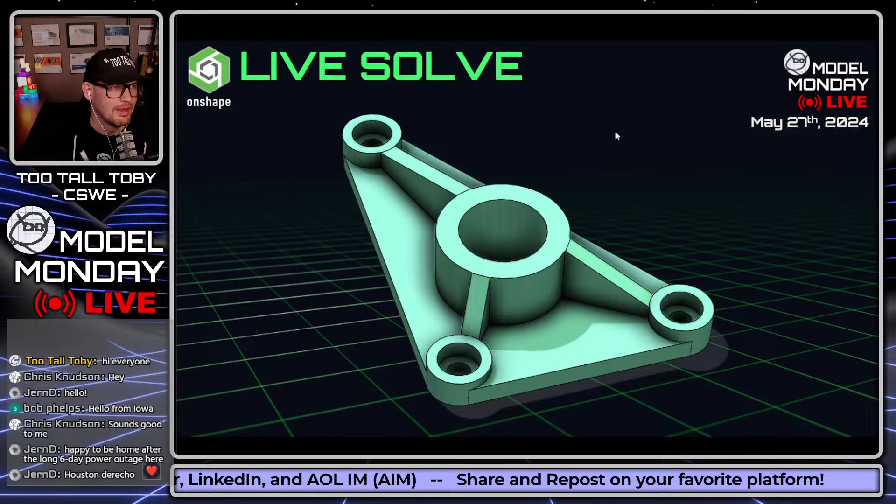All right, let's do it here. We're going to do a live solve using SolidWorks. Whoops, that's a lie, there should be a live solve using Onshape. We're going to solve that model, and of course, we're going to do our live challenges.

If you're here for the first time, let us know in the chat, and there are lots of chat pros who will help you out and answer any questions that you have. But what we're going to do tonight is I'm going to show you a 2D print and challenge you to turn that into a 3D model to calculate the mass and to enter that mass directly into the YouTube chat. And the fastest person to do this will be declared the winner of the point.

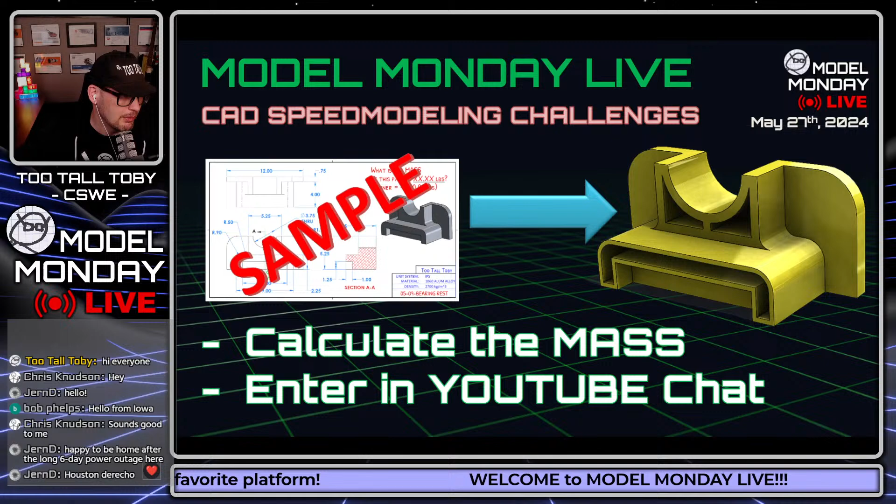Final points are up for grabs right now for the month of May. And then we will move into June, and we'll talk all about what's happening in June here in just a moment. But the basic rules are that you can use any 3D CAD package.

As long as you can input the density and output the mass, you can use any 3D CAD package.

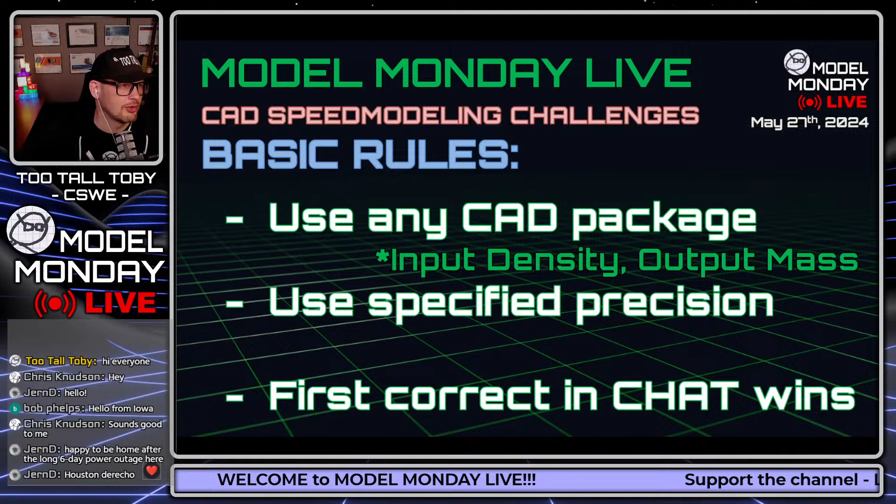Make sure you use the specified precision on these answers, and the first correct answer in the chat will be declared the winner. The unit systems we use here are IPS and MMGS, inch pound second and mmgs.

The materials we use are listed down below. If you're here for the first time, make sure you capture those materials in your materials library so we're all working from the same materials, so you don't get caught off guard. We want everybody to have the correct material density in their library, otherwise you're not going to calculate the mass correctly.

This is meant to be fun and good-spirited. Occasionally I will make a mistake. I'm going to be honest with you guys, I didn't really properly quality check the second challenge tonight, so it's possible the second challenge is going to put you on a wild goose chase. But we'll see what happens, maybe I'll click along and see if we can't figure it out together.

And the Ivan exploit is permitted in these challenges. So the Ivan exploit is permitted, be on the lookout for any opportunity to use the Ivan exploit.

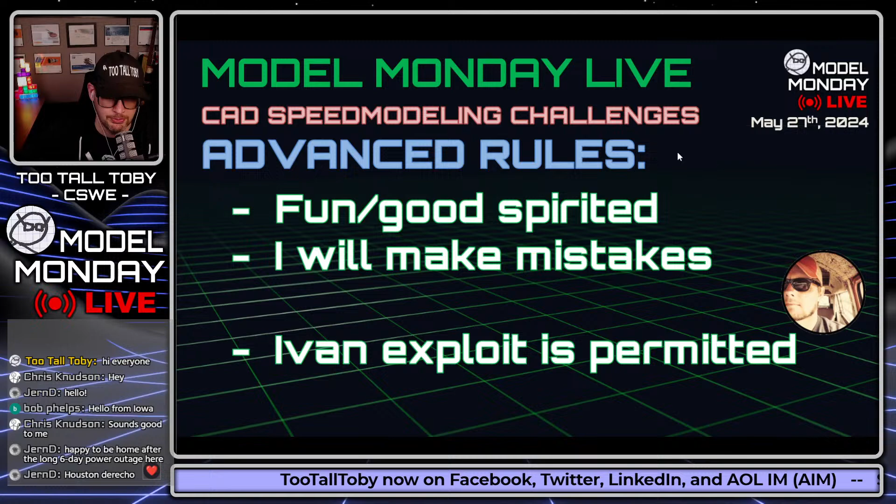All right, with that, let's get into this first challenge. This first challenge for all of you will begin in 3, 2, 1, go.

What is the mass of this part in XXX grams?

Kind of a cool part, it's called latch lock. This part is using 1060 aluminum alloy as the material, with 2,700 kilograms per cubic meter as the density. This part is a tier 4 part. Tier 4 indicates the complexity of the part, meaning the number of features required to make it reasonably. This probably is in between a tier 3 and a tier 4, right on that cusp, right on that magic cusp between tier 3 and tier 4.

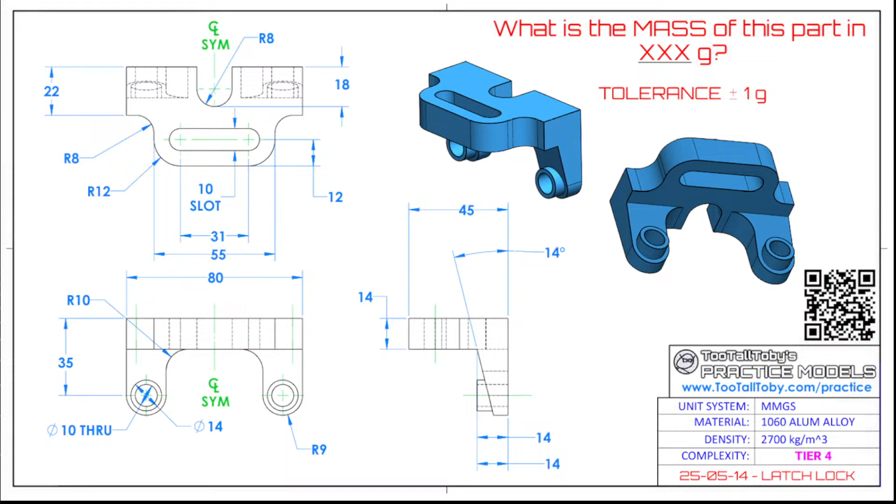Let me know, guys, if the music is too loud. I'm digging these tunes, so I'm going to leave them up a little bit. All right, let's get into it here.

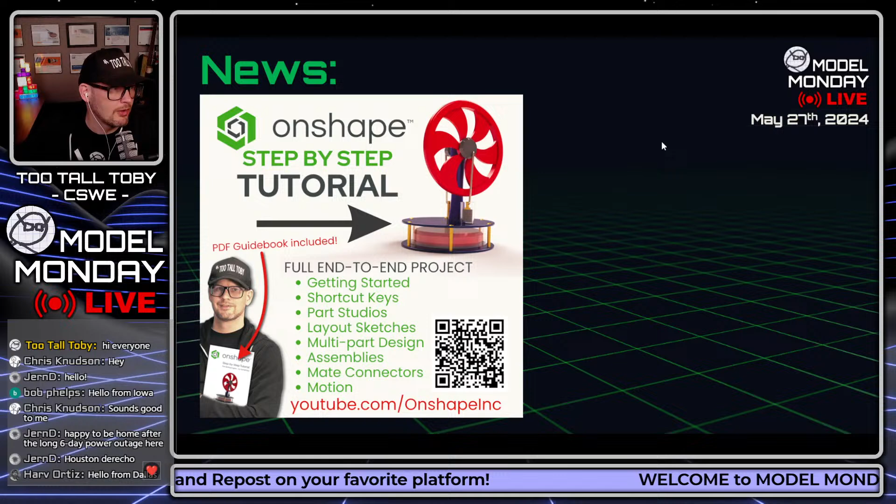We did post a nice Onshape tutorial a couple of weeks ago, so if you're an Onshape user and haven't had a chance to check that out, do so—it'll give you everything you need to know about Onshape, a start to finish, end-to-end tutorial. We also posted another video here on the TooTallToby channel this week for Onshape. If you go to youtube.com/TooTallToby, which is really where you are right now, you'll see that video posted this week on branch and merge.

This is huge. I can't understate how valuable this idea of branch and merge is, especially the merge part of it. The fact that Onshape can merge geometry together is huge—you're going to hear me talking a lot about that over the next few weeks. Definitely check out that video if you haven't had a chance. I know those videos are a little bit long, so if you're really trying to strap in and learn Onshape, they're going to be good for you.

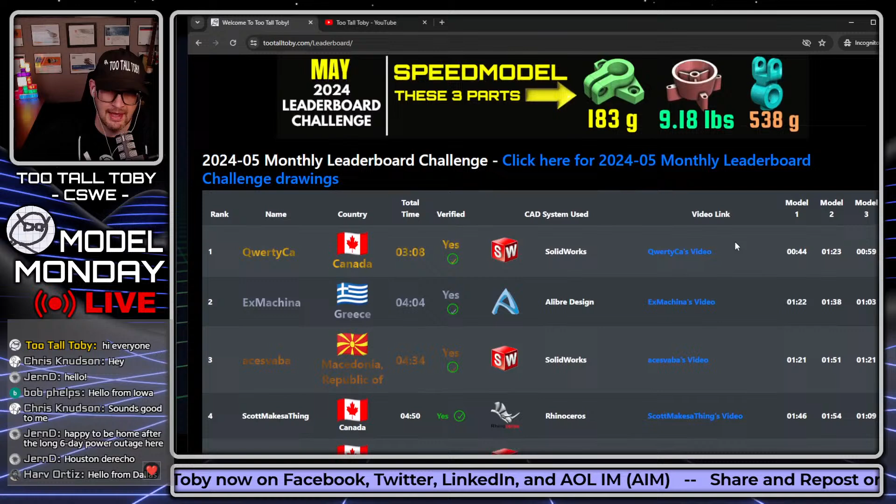QWERTY CA, who came in first place last month using SolidWorks, is once again just dominating and showing some clever workflows. I encourage everybody to take a look at this video. What you're going to see almost looks like it's sped up, but it's definitely not. This is actually how fast QWERTYCA is with his commands, and a very clever workflow, particularly the use of the shell command after he gets this fillet in place. He's going to do a shell here and a multi-thickness shell to create that geometry. I mean, that happened really fast. This is almost something we could slow down rather than speed up.

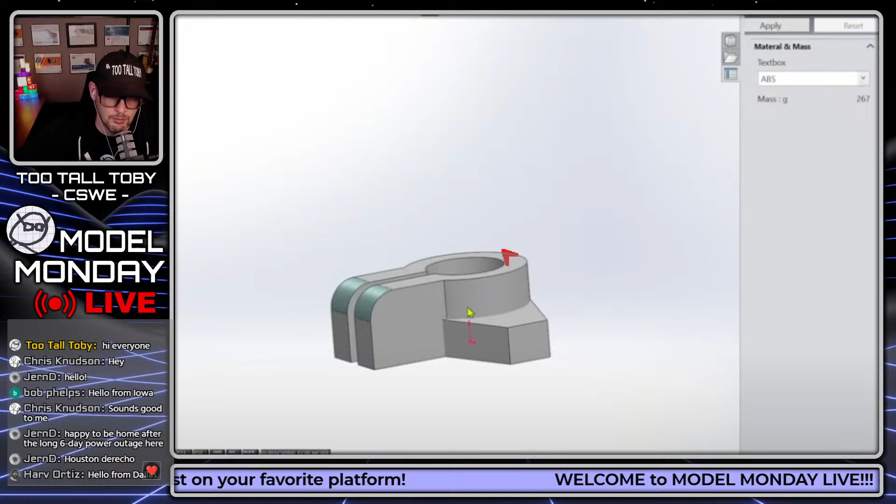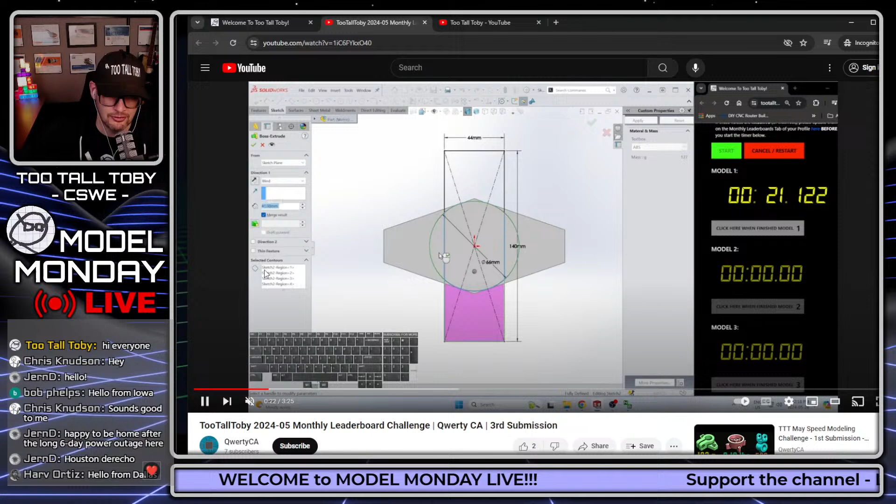Let me pause it here. If you look at this shape, we've got a wall thickness here and a wall thickness here. Most of the time what people would do to accomplish this is sketch a circle and a rectangle and then cut extrude down through the model. But instead, what QWERTYCA did was a multi-thickness shell for that feature, which completely blew my mind. He did that as a shell to hollow that out. It happens really fast - here's the extrusion, now he fillets, face fillet, now he jumps into a shell, switches to multi-thickness, picks these two faces, and then you end up with this geometry.

So I'm excited to do kind of a reacts video to this run. This is a really impressive run. I definitely encourage anybody considering doing the leaderboard challenge to take a look. But even if you're not going to do the leaderboard challenge, just take a look at TooTallToby.com/leaderboard and watch some of these runs. It's incredible, not only the speed, but also how clever some of these features are that he's using.

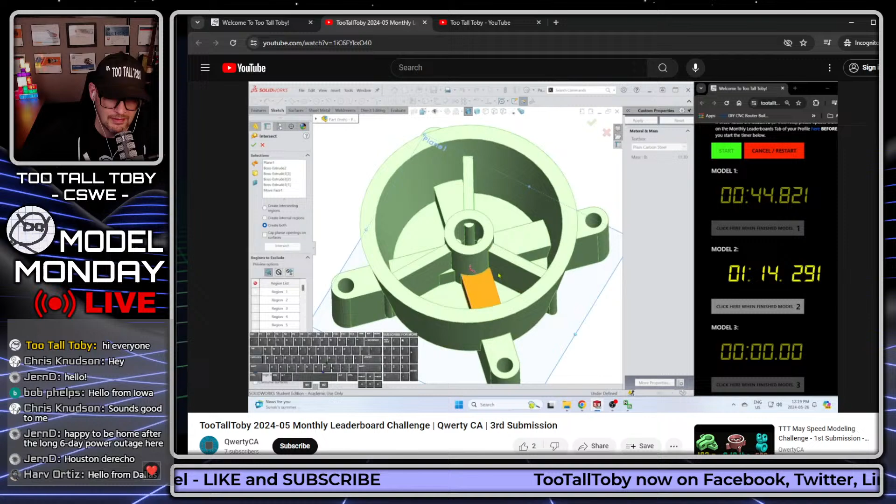Like in the case of this model, when he gets to this internal geometry, the use of the intersect command to clear this out - I would have never thought to do it that way. He's going to go through and use intersect to remove certain bodies and remove all the excess geometry from that part, and then end up with the correct mass. Really, really clever use of intersect.

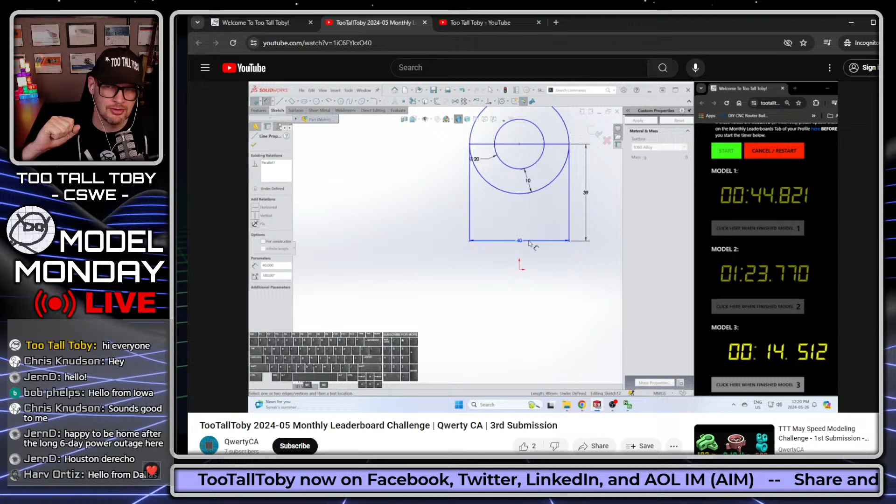The cool thing about watching these runs is that you get the chance to see an out-of-the-box way of thinking about using certain features, and you may end up finding a good spot to use those same features in your own career. Even if it's shown as a SolidWorks feature, you might find a way to use that in Onshape. There's been plenty of times where I've seen people run stuff in Onshape and then used it in SolidWorks, or seen it in SolidWorks and run it in Onshape, or seen it in Alibre.

Ex Machina is in second place here with a time of 4:04 for creating all three of these models. Super impressive, and some really clever stuff he's doing with Alibre. I dabble in Alibre as well, and he's doing some clever stuff constructing these models. So again, even if it's not your CAD system primarily, just watching other people run through these models and thinking to yourself, wow, that's a clever way of getting that geometry or feature - I wonder if I can do that in my CAD system. And you try it, and then you're like, oh, that works great.

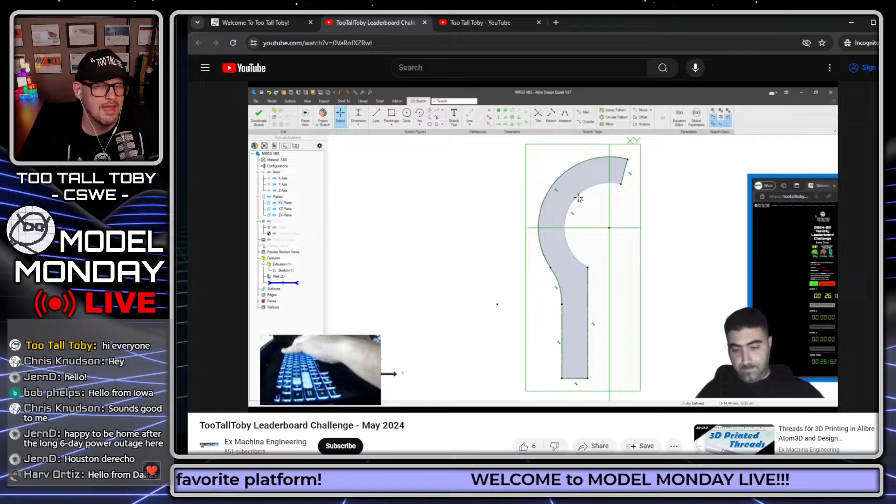Like Ex Machina, the way he did it, instead of doing the shell with multi-thickness, he extruded that first extrusion as a thin feature extrusion. And then later in the model, he does a move face to clean up that extra geometry. Just kind of thinking outside the box a little bit, and I think very clever solutions to some of these challenges. Later on in the model, he's going to use move face to move this over a little bit. I think that's a really clever way of going about that.

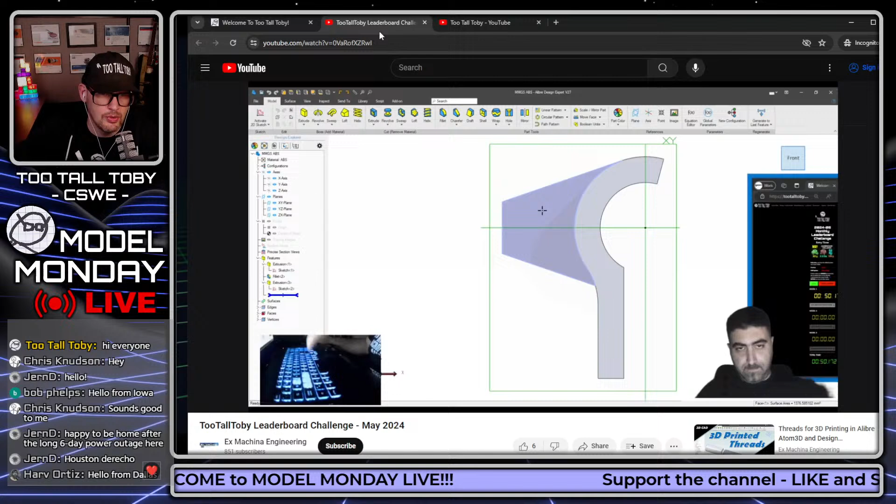Right here, we're going to see this move face. He's going to shift these faces in. There it is, move those in. So cool, I just want to see that again. Anytime somebody uses move face, I think they get bonus points. Here you see he's doing, it's called offset face in Alibre, but basically a move face offset there. Look at that, that's so cool. And then just filleting those edges from the top down. Very, very clever, very good workflow, and definitely some stuff to learn there, even if Alibre is not your CAD package of choice.

So you can see here what this leaderboard looks like currently. There's basically 9 people on it, my run is down here as well, but there's basically 9 people on this leaderboard if you ignore my run. And they are all very, very impressive. There's a Rhino user on here, there's an Onshape user, there's no Fusion 360, no Inventor so far. So I'm going to try and hit up those message boards tomorrow and see if I can get some of those runners in there.

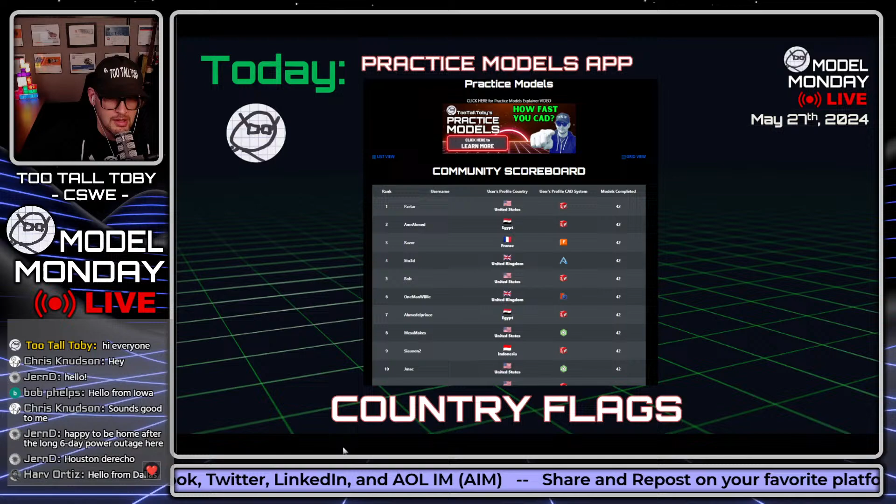And of course, the Practice Models app, I mentioned it earlier in the live stream. We've done some updates to the Practice Models app. We've added the country flags of the people who are completing the models, and we've added the completion ratio. So now when you are in the Practice Models app, which means you go to TooTallToby.com/practice, that's where you'll find it.

Once you go to TooTallToby.com/practice, every time you finish one of these challenges, it'll say completed, and you'll get a little color thumbnail of the challenge that you completed. But for the ones you haven't done yet, when you click into them, you can see how many people have successfully completed this challenge. Now, that may be because 173 haven't tried, or it may be because some of them were getting stumped on this challenge. Some of these challenges are harder than others, so it could be that people are getting stumped on the challenge.

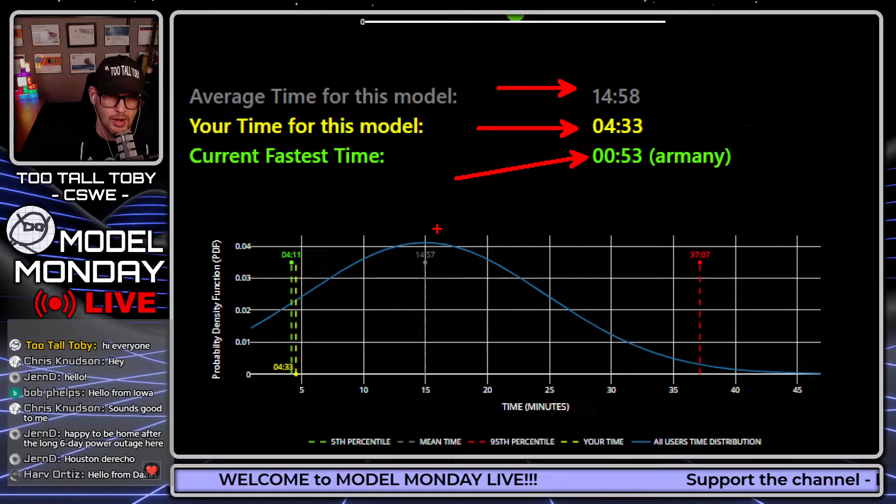When you do complete the challenge, what you'll see is some additional analytics here. You'll see who finished this challenge the fastest, you'll see what your time was. So your time, 4:33, average time almost 15 minutes, fastest time 1 minute - wow, that's pretty fast. We do purge the times that are at the very bottom of the curve if it seems like they're unrealistic, but.

Another great app for you to try out. You go over here to TooTallToby.com/practice, you can get in here and you can see all of these different practice models. And if you go to the tab that says Community Scoreboard, then you can see the top of the scoreboard here.

One Man Willie from the United Kingdom has 42 models completed, a FreeCAD user. So 42 models - there are 42 models total currently. You can see here there are 12 people who have done all 42 of the available models. We just released the newest one, I think, yesterday. So that's pretty impressive considering it's a holiday weekend.

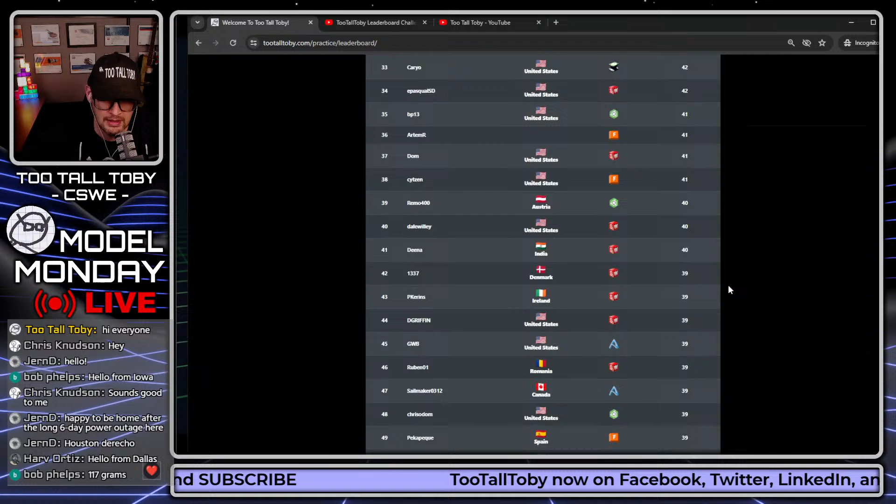People are on it. Lots of people on this completionist board, and lots more good stuff coming in the future with the analytics, but kind of some cool stuff. You can see how you're doing against the rest of the field, and enjoy those practice models - get them, like I said, get them while they're hot.

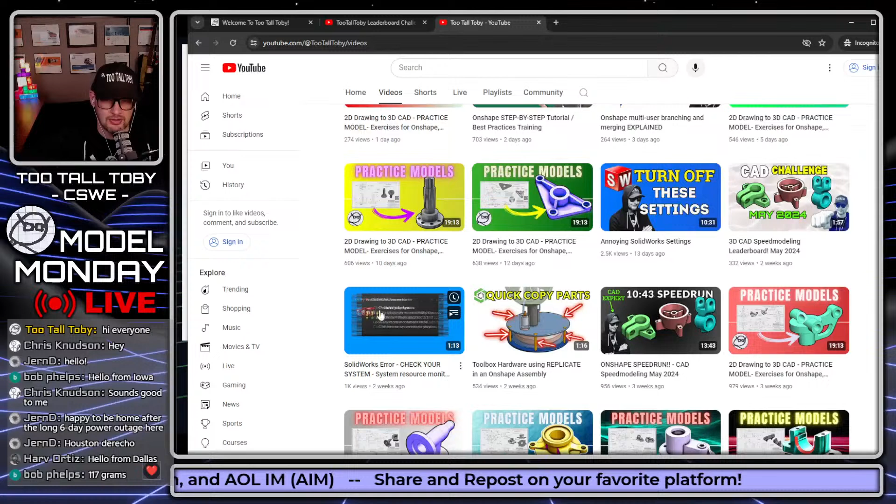The YouTube channel has mainly been practice models. I haven't had much time to post additional tips and tricks, but there is more content coming, so be on the lookout. We did post a video recently reminding people what the check your system function does. Check your system is actually a song, so if you haven't heard it before, check it out. It's a great song, and it reminds you what the SolidWorks tool does.

We also have some more practice models posted. I made a video called Turn Off These Settings, three settings that I always tell my students to turn off and look out for in SolidWorks. We've got a video on branch and merge that I talked about earlier, and then the rest are just practice models and my May leaderboard.

So haven't had too many new power moves type videos going up. Of course, we have the shorts that go up every single day, and those are like power moves, but most of the stuff has been practice models. I have been filming, I've been in the studio, so you'll see more power moves and tips and tricks videos coming out this week and next week. But of course, the shorts come out every day.

We've been doing a new short every single day since January 17th, except for one single day that I missed, and I made up for it early the following morning. So just about every single day since January 17th.

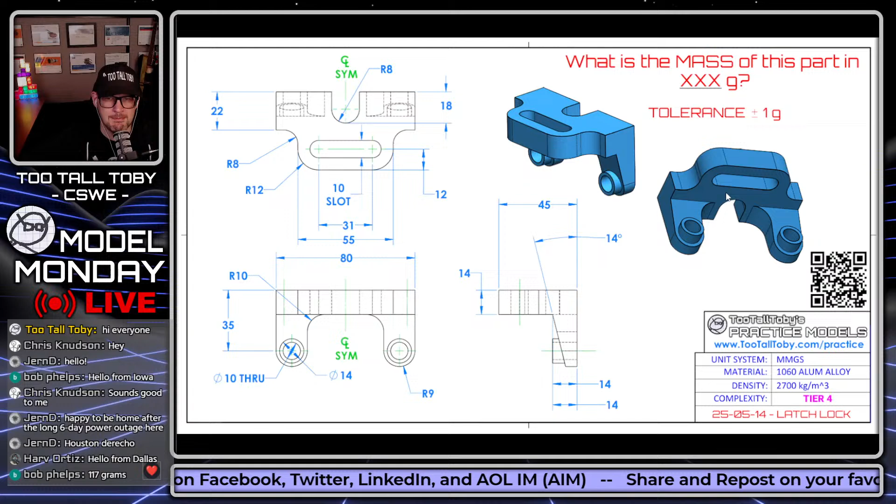Whenever you're trying to create a 3D CAD model, you always want to start out by coming up with a game plan. If I was looking at this model here, I think my game plan would be to start by looking down on the top, kind of creating this sketch as a footprint. And then I would address these little legs that are sticking out here. The leg sticks out with some draft, but it also has a fillet on top.

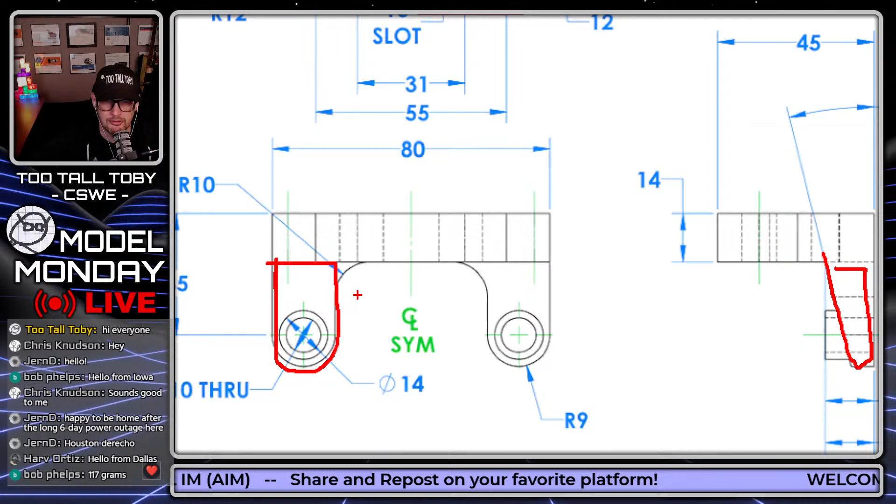I'm pretty comfortable using the draft feature in SolidWorks, so I would probably opt to create that as like a half tombstone shape, and then draft it afterwards. Then I would go in and create maybe this circular extrusion sticking out. I would just model half of the model, not the whole thing, and when I'm done modeling half, I would just mirror the whole thing. So that's kind of the game plan.

Like I said, we do have an extra couple of minutes tonight here. We're running a little ahead of schedule, so maybe I'll just blast through this one, and you guys can tell me what you think about this when we're done.

So I'll start out by grabbing a screenshot. Let's get into SolidWorks here. New - this is going to be a part using, what is this thing in, 1060 aluminum. Now let's stick to the game plan here. Always good to come up with a game plan.

Try to stick to that game plan, but if you want to deviate, that's totally cool. On the top plane, begin a sketch, orient the view, and I'm going to start out here.

Coming over with a line at 40 millimeters, come down in this direction with a line at 22 millimeters, come over this way a smidge, come back, touch that endpoint, come off of that endpoint with a tangent arc. We'll come out this way, come back, touch the endpoint, come out this way.

This one's going to have an arc of radius 12. I meant to put that radius in on the other one too, that was just kind of a misclick. And then we'll end up vertical to the origin.

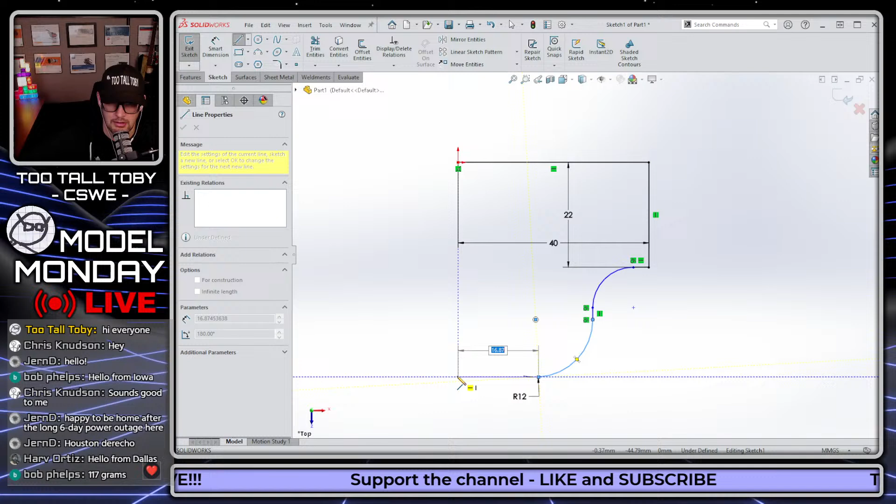Let's make sure that these guys are tangent by clicking the endpoint in between them. Make sure that's vertical, horizontal.

Let's add a dimension here, that's my radius of 8. And then we'll add a dimension from here across to the center, and that's going to be my 55/2. Final dimension here is going to be from the very back of the part to the very front of the part, and that is going to be a dimension of 45.

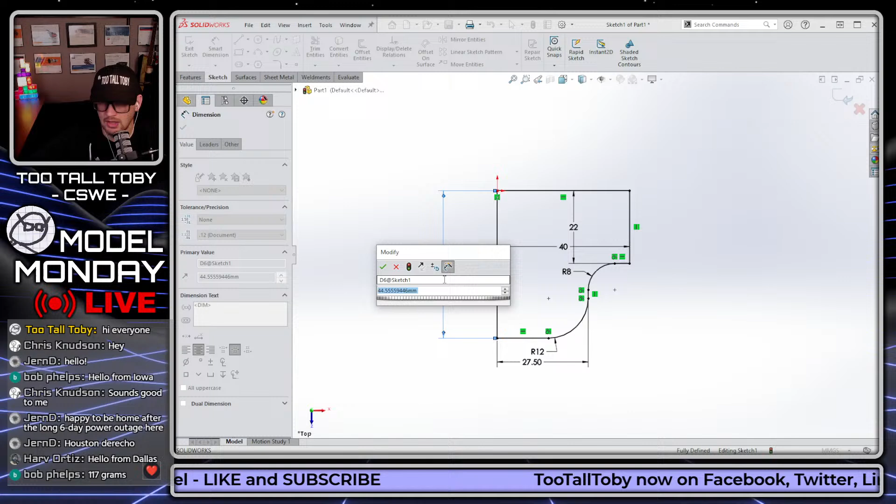And then maybe I'll add in that slot just in this sketch. I'm only going to be creating half of the model, but let's add in a slot here. I think this one, if my math is correct, this distance here is 15.5/2. The width of that slot is 10. And then the distance of the slot to the front is 12, so it's just kind of centered on that arc, but I'll add in the dimensions anyway, just to make sure.

Now let's turn that into an extrusion. We'll grab just this contour. That's going to go to a depth of 14, and we'll do a reverse direction. And there we go. Now I'm going to go back here to this backside, begin a sketch.

I'm going to create that tombstone shape. So start by sketching a vertical line, come back, touch the endpoint, come around. Let's give that a radius of 9. And then we'll come around this way and close that.

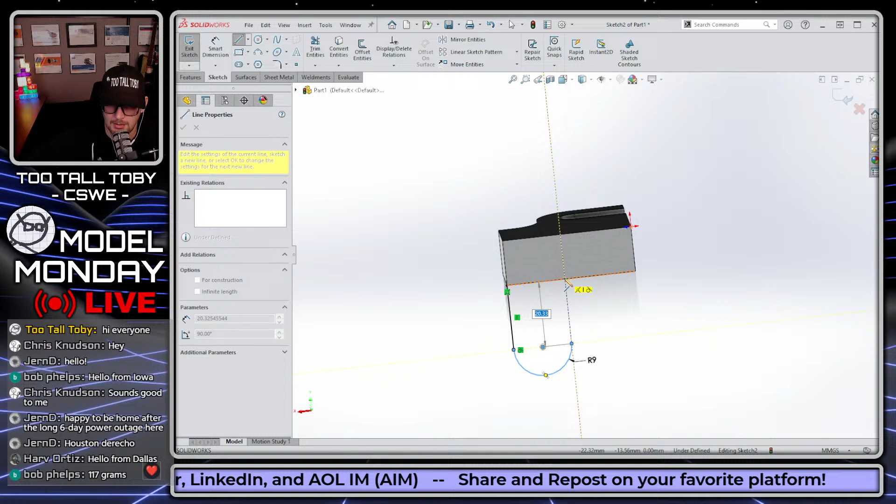That is going to be located relative to the top of the part, down to that center point there at 35. We could include the hole in this sketch, or we could do the hole as a separate sketch, but since we're trying to go for time here, it probably makes sense to include the hole there. That's going to go to a depth of 14 as well.

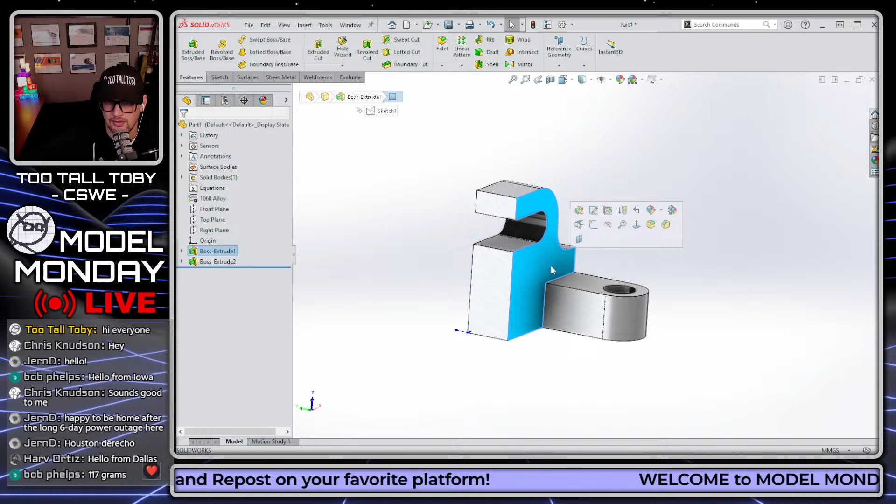There we go. Now we can click on this face and add some draft. So that's going to become our neutral plane, that's our drafted face, and then that draft angle is 14 degrees. Lots of 14s in this model, huh?

And then we could pick this face here, begin a sketch, take this edge here, do a convert, and then turn that into an extrusion.

It's going to be a thin feature extrusion with a wall thickness of, what is it, 14, 10, 2. Wall thickness of 2, and then reverse direction, also 14. Very convenient, that one's going to go to 14 as well. I like it when it works out like that.

And then I think I've got one more fillet here, so we'll do a fillet on this edge with a radius of 10. And then pick this face, expand this menu, hold control, pick the solid body, let go of control.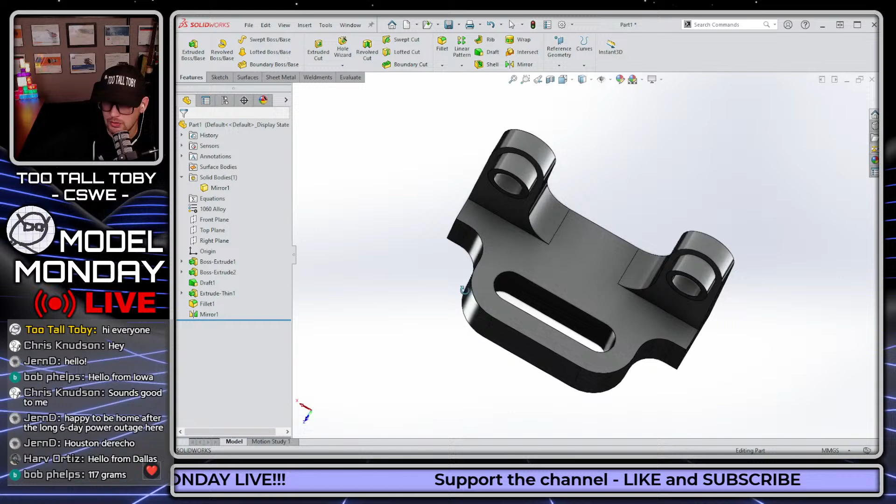And then we map the mirror command to our context toolbar, so that lets us quickly mirror everything. And then we can do the final spin. Looks like there's one more feature I forgot to acknowledge.

We've got like another tombstone shape here, or a slot shape. A lot of times if you have that tombstone shape, you can do a slot and just kind of have some hanging off the end. So that's going to be a slot.

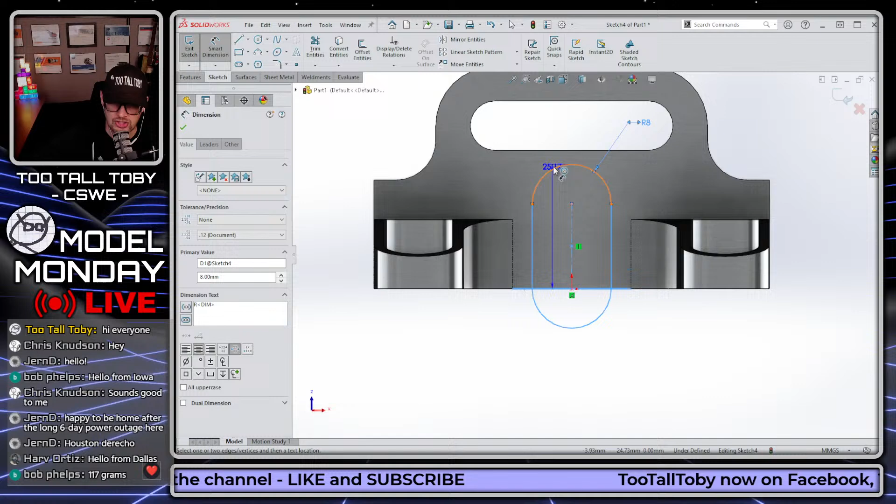The width of this thing, or the radius of this thing, is radius 8. And then the distance to the peak of the arc—you pick this curve here, or this line, the edge here, hold shift, and then pick the peak of the arc, and that'll give you that dimension to the peak. So you don't have to go back and modify the leader or do the math. I guess you could also just dimension it to here at 10, right?

No, it's not really that difficult of math. So that's going to be an extrude cut, right mouse button, through all, right mouse button. And now we can do the final spin. I think that looks pretty good.

Maybe I'll go over here to my appearances, plastic, high gloss. Let's add a blue color there. Okay, now that looks good.

And then we'll go over here to our sensors. Well, let's see if there's anybody else coming in. Don't think there's anybody else coming in right now. So sensors looks like 117 grams. So I'll get in there in the chat as well and type in that 117. And let's take a look here.

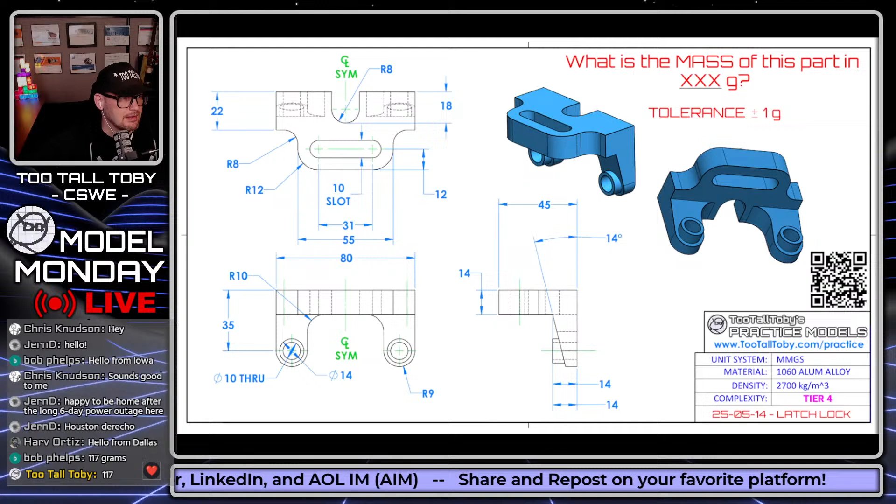What do we got? Latch lock tier 4. Bob in the chat came in with 117. TooTallToby in the chat came in with 117, and the correct answer is 117 grams. Yes, so GG to Bob Phelps. Well done, my friend.

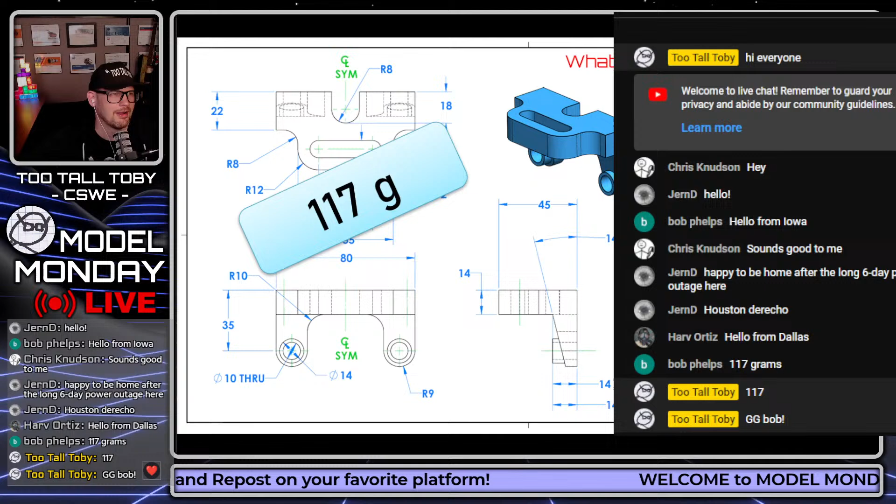That was awesome. And of course, anybody else who's out there who's trying it, who got it, congratulations. If you're just trying it, congratulations. And if you're watching the recording and you're trying it in the recording and you got it, congratulations to you as well.

Alrighty, let's move on to our next challenge. Challenge number 2. See, there's 22 people in the chat. We're picking up some steam on this episode, this late live episode of Model Monday Live. So hope you guys are all enjoying yourselves.

If you're just coming in, congratulations, you're just in time for this next challenge. So let's flip over to full screen here. And this next challenge begins in 3, 2, 1, go.

What is the mass of this part in XXXX grams? The tolerance is plus or minus 2. So here you see kind of an interesting part. I kind of like this part. It's called pipe mount with hex.

You'll notice that on one side you've got those hex cutouts, and on the other side it's more of a C-bore cutout. You also notice that the 12 through hole and the 20 diameter sticking up from that through hole are only in 4 places. So that does not propagate around the entire model.

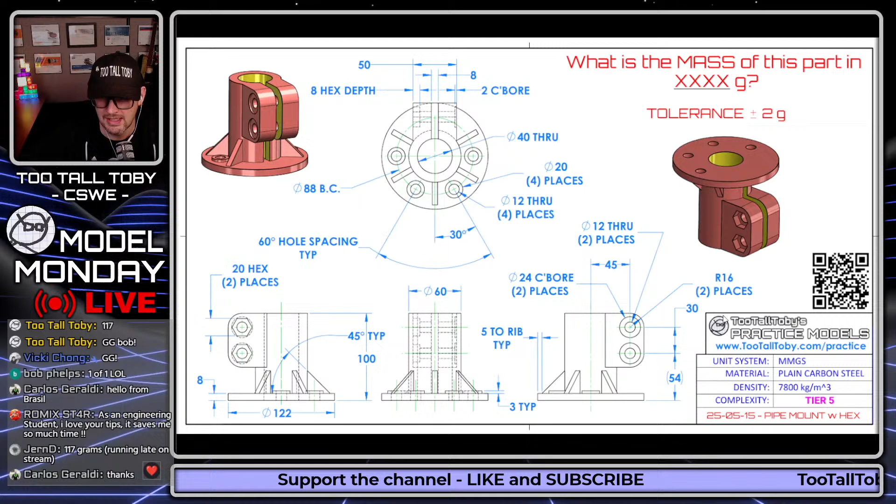This is one that we had a few weeks ago on the live stream as a challenge for the chat. We also posted it as a practice model, and I had a lot of people in the chat asking for advice, particularly on the area of the ribs. Now this week, I did record a video on how to address this issue with these ribs. I know the ribs in this model are a little tricky, so I did record a video this week kind of showing how to address that. So be on the lookout. I'm just finishing up editing it, it'll release a little later this week. So you may hear me during this live solve referring to the video explaining the ribs, and that's just because it'll provide continuity when we release this chopped video on the channel and give people a reference to those ribs.

So let's get into it here. A SolidWorks 3D modeling live solve tutorial on a pretty tricky part, the stand base 3, a tier 5 part. And you can see there's a lot of Toby notes on this part.

The ribs touch the circular bosses at tangent. Ribs start and end the same height as the circular bosses, and the ribs are centered on the center line. And the rib is touching off tangent to this radius here of the arc, kind of running up this left side here.

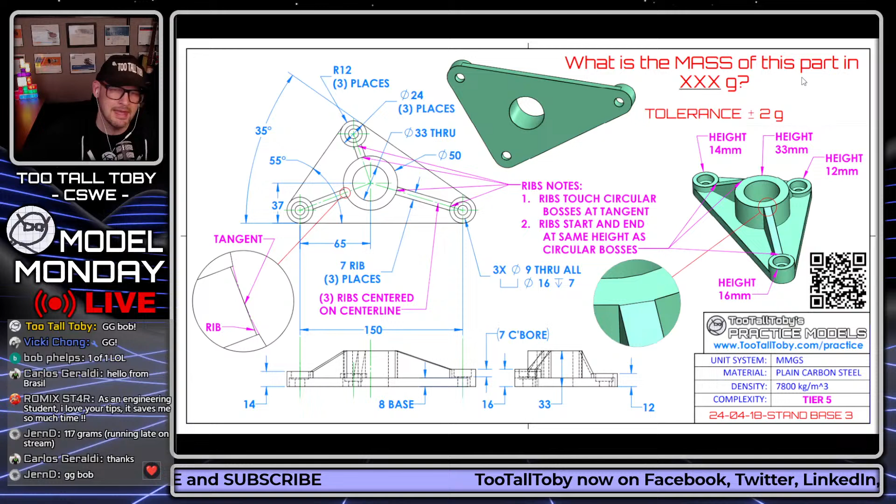So these are the first things you want to look at, kind of any notes in the model, and then you want to get into your game plan for the model. The game plan always starts with what is going to be my starting plane, what is going to be my starting profile. So my starting plane for this model is going to be the top plane.

My starting profile is going to be this main sketch of the triangle. And if you're ever not sure what to use as a starting plane or starting profile, it's always good to just pick the footprint of the model. However the thing is going to lay on the table or mount to the next part, that's always a good choice of a starting plane, starting profile.

So you could always go with that. You could always kind of use that as like an anchor and a good way to kind of make sure that you're making a good decision for your starting plane, starting profile.

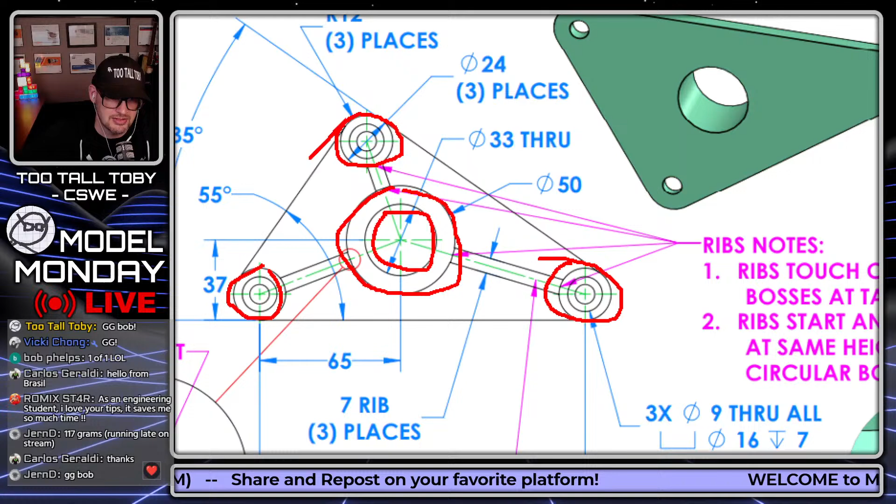Next thing is going to be, is there any other geometry we want to include in that original sketch? As CAD software gets more and more mature, it's often very beneficial to include additional sketches or profiles in that first sketch. So I'll probably include all the profiles that I just sketched in red there in that very first sketch. Just include all of them, and then that way I'll be able to continue to extrude from that one single sketch. So my first sketch is actually going to look like this, and that should be the first step of your game plan, deciding kind of what that first sketch is going to look like.

Then you want to start thinking about what your features are going to look like. So my first feature is going to be this extrusion of this triangular shape. My next feature is going to be this extrusion of this 12mm height boss, then this 14mm height boss, then the 16mm height boss, and then this 33mm height boss.

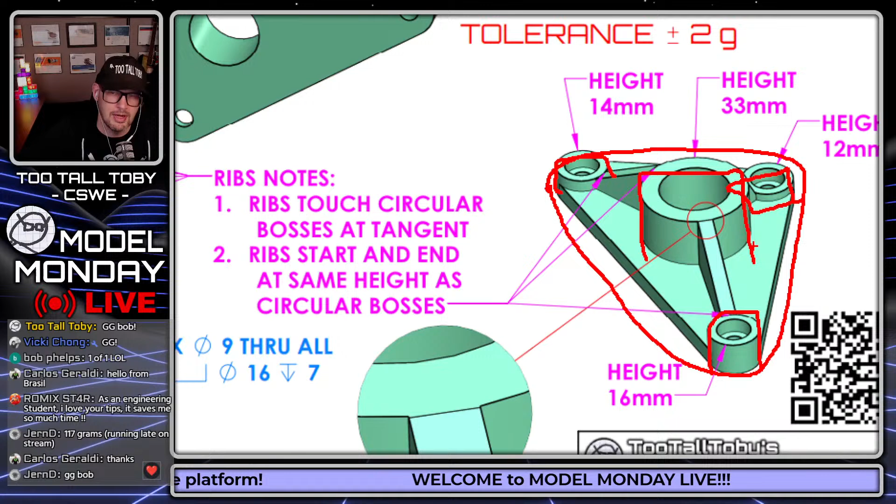So now I've got those first 3-4 features in place. Maybe I'll save that hole that's going through the center for last. It's usually good to save those types of holes until the end of the model. So now I've got kind of the basic game plan for the initial features.

Now it's time to create the ribs, and creating the ribs is going to be its own little monster. We do have another video on the channel talking specifically about the ribs, so if that's the main area you're running into a challenge, go check out that video. But if you want to see the entire live solve for this part, here we go. Let's get into it. This is how we do it.

I'm going to start out with a screen grab of this part, grab this whole part here, and move it over onto my second screen so that I can use the dimensions from that part as I'm modeling. Let's take a look at SolidWorks and begin a new part.

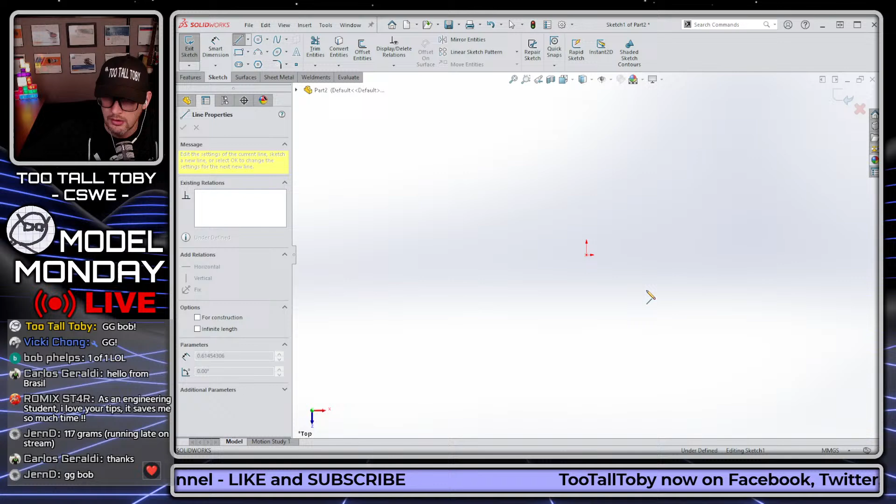This part's going to be in plain carbon steel. We're going to go to the top plane, begin a sketch, orient our view, and create the geometry for that triangle. It looks like it's going to come over here. We're going to have a radius of... what is the radius here?

Radius of 12. Then we're going to come up at an angle, come back, and touch that endpoint, radius of 12. It's very useful to learn how to use the line into arc tangency tool, and then how to auto dimension those radii along the way. That'll be really helpful too.

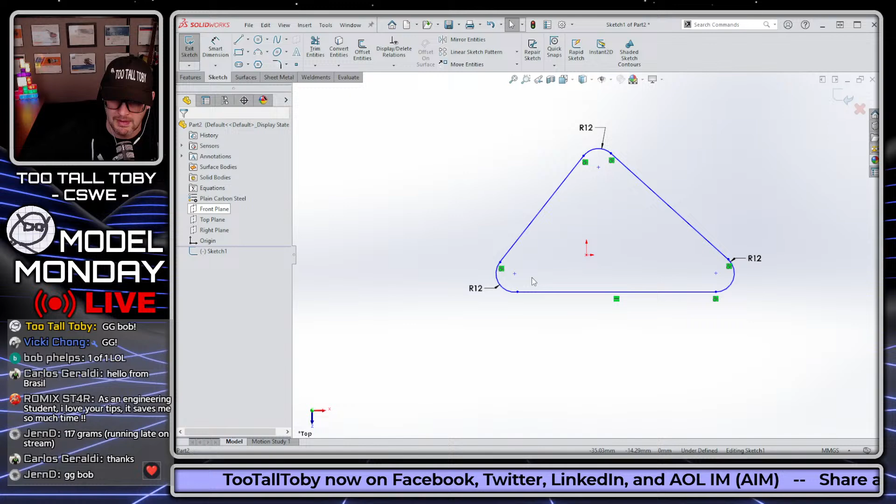Now we can take this point and this point and bring them together, take these two and make sure that they are tangent. We could probably get rid of these radius dimensions, then hold control, select all three of these, and make them equal. Then we're going to add our circles in the center here.

This one is going to have a diameter of 50, and this is going to have a through diameter of 33. We're going to have our circle here, which is just going to match up with the existing radius of 12.

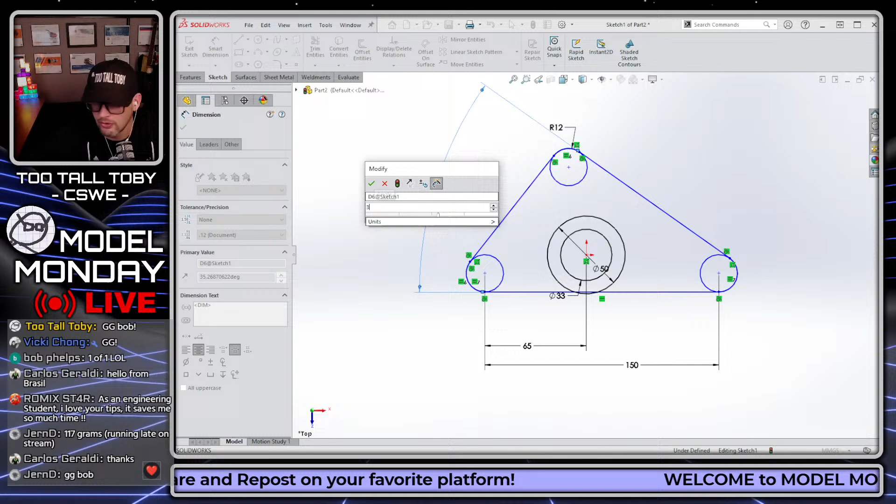Now we're ready to add in some locating dimensions for this thing. It looks like it is 65 over to this corner, and 150 from boss to boss in this direction. It looks like it is an angle dimension here of 35, an angle dimension here of 55, and then a distance from the center of this circle down to this line of 37. And there we go.

Nice, black sketch—always what we're hoping for when we're working in SolidWorks.

Now we're going to turn that into an extrusion for the base. The base has a height of 8 millimeters, and the contour that we're going to use for this is going to be this contour here. And look at that—there is our base.

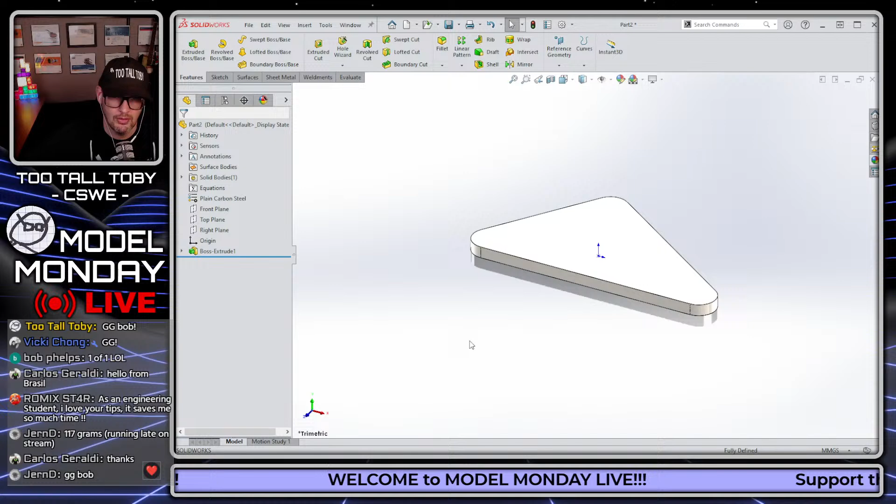Now we're going to show that contour. Remember, in SolidWorks, a good tip is that you can right-click on a sketch and choose sketch color. We could change this to a different sketch color to make it pop out a little bit and make it easier to select.

So now we could press the S key, extrude, pick that circle, and bring that up to a height of 12. Enter, enter. If you press enter again, it takes you back into the extrude command. Pick another circle—that's going to be 14. Enter, enter, enter. Pick this circle here, where that's going to be 16. Enter, enter, and look at that—we got all three of those bosses.

We could even press enter one more time and pick this guy here, 33. Enter, enter. That's a pretty fast way to get through those multiple extrusions from one single sketch.

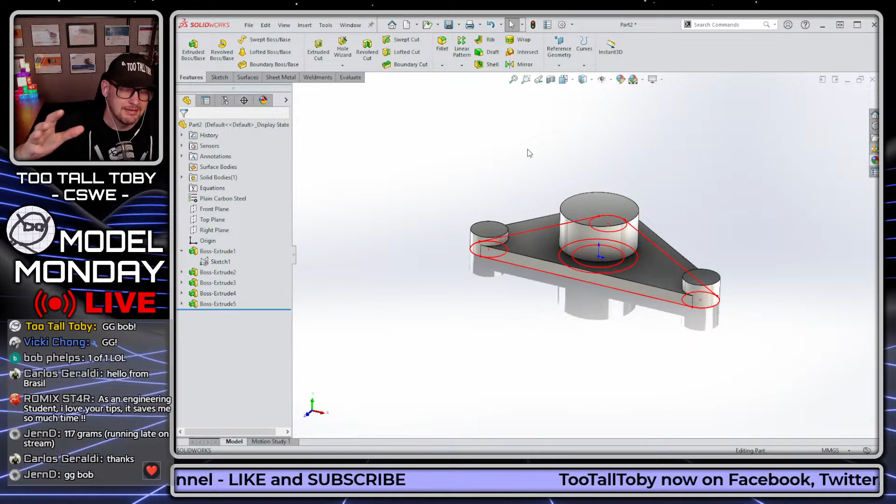So now that we've got those extrusions in place, we're ready to start talking about the rib command in SolidWorks. I've made a separate video about this, and I'll include a link to that video. But the main thing that catches people with the rib command on this model is the idea that a rib is an extrusion that goes up to next in three different directions.

So let's start out by creating the rib plane. Let me just make this a different color here. The rib plane for this thing is going to be created by going to View, Temporary Axes.

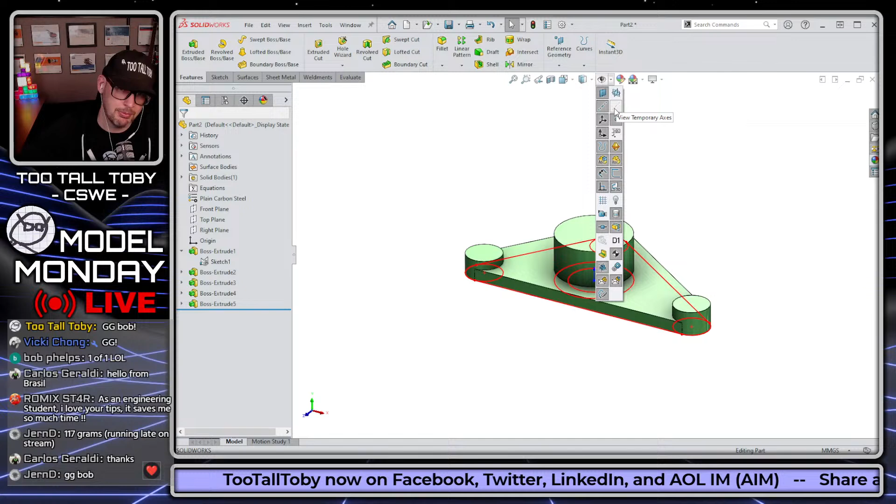Once we go View Temporary Axes, we can pick an axis here and an axis here, and use those axes to construct the plane. So we're going to go Reference Geometry, Plane, pick this axis, pick this axis, and there we go. Now we've created a plane.

Now, on that plane, we're going to create a sketch of a line, and we're just going to drop in a line right here for sake of illustration for this live solve, and then go to the command Features, Rib. What does the rib command do here? It extrudes up to next in this direction, up to next in this direction, and up to next going down into the model. So when we hit the green check mark, that sketch line extrudes in all 3 of those directions.

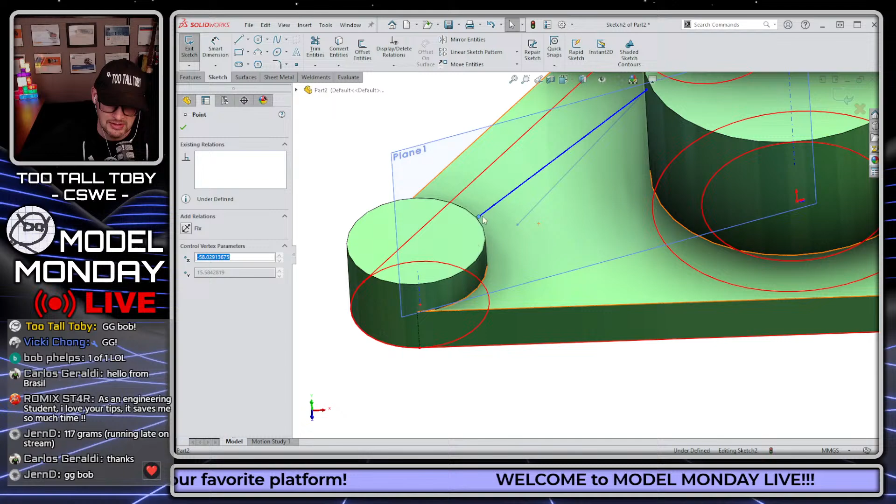It's up to next in 3 different directions, and that works great when the extrusion can terminate. But when the customer says, I want you to create a brace that goes from this tangency point down to this tangency point, things get a little bit more dicey.

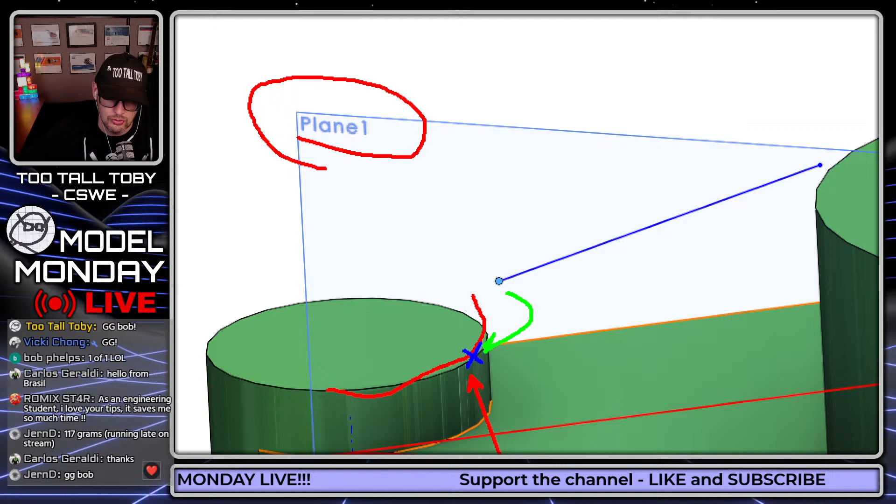Now, to calculate that tangency point on each of these bosses, we're going to use what's called the Pierce constraint. The Pierce constraint is a relationship where this curve here, the circular curve of the cylinder, passes through this plane. So if you imagine that intersecting point, it's probably right about here. Wherever that curve is passing through that plane, that's what's called a pierce point. What we're going to be doing is relocating this point down to that pierce location. That's what a pierce relationship is.

So if we choose this curve here, hold control, choose this point, and let go of control, we can see we can add what's called pierce, or make pierce, over here pierce, and that point is going to move to the location where this curve is passing through this plane. So pierce. And then I'm going to do the same thing up here: pick the curve, hold control, pick this point, let go of control, and choose pierce.

Now, when we try to create the rib here, it fails. So we go rib, and this is supposed to be 7 millimeters in width. And SolidWorks says the resulting rib did not intersect the existing model.

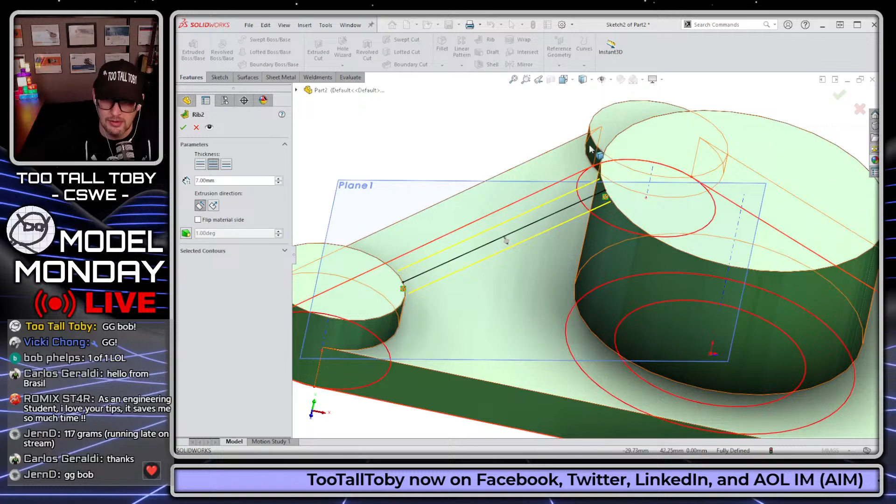So if you think about it, what the rib is trying to do is go up to next in 3 directions. It's trying to go up to next in this direction, up to next in this direction, and up to next in this direction. So one of those 3 up to next conditions cannot be solved.

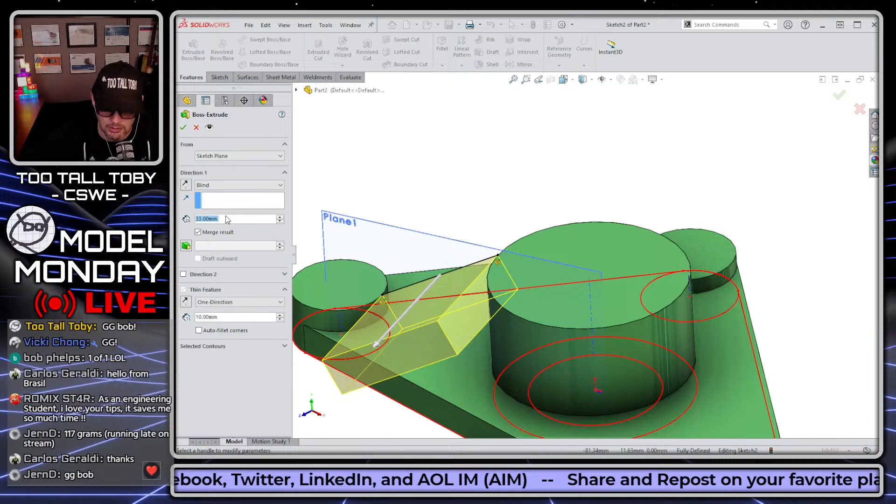So what we can do to visualize this problem is do a thin feature extrusion. Let's say we do a thin feature extrusion here, and we make this 7 for the thin feature, and make it mid-plane. Make it 7 there as well.

If we look at this pseudo rib that we're constructing here, and we look at it dead on normal to, or perpendicular to, the rib itself, what you'll see here is that there's a little sliver of the rib that's kind of peeking up over this edge. It's a little sliver here, a little triangle, peeking up over that cylindrical edge. So you've got the cylindrical edge here, and then you've got this little sliver sticking up over that edge.

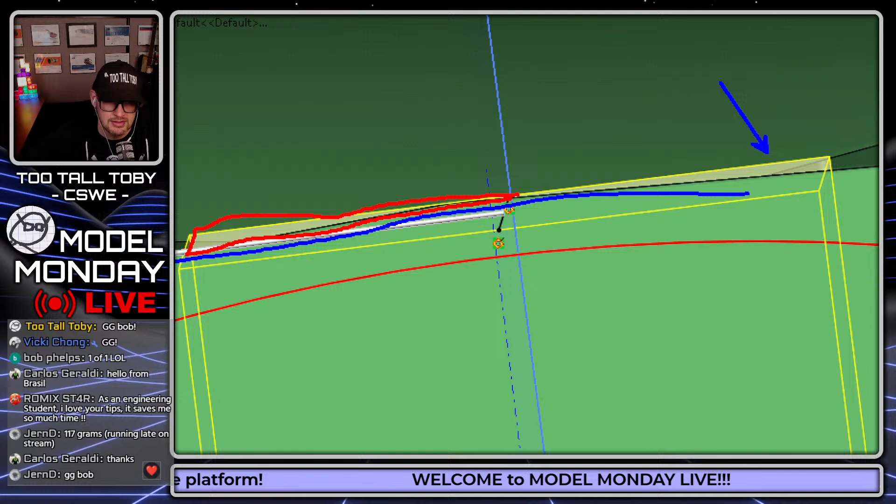And that little sliver is the problem. When we go to construct this rib, that little sliver doesn't have anywhere to terminate. When you try to go up to next, SolidWorks is like, I don't know where you want me to go with this thing. It just keeps going forever because that little sliver is peeking up over that edge. And that's why this is failing.

So there are 2 solutions here. Solution 1 is we could just drop in a little flat spot on the rib, and then we could go rib, and this is going to be 7.

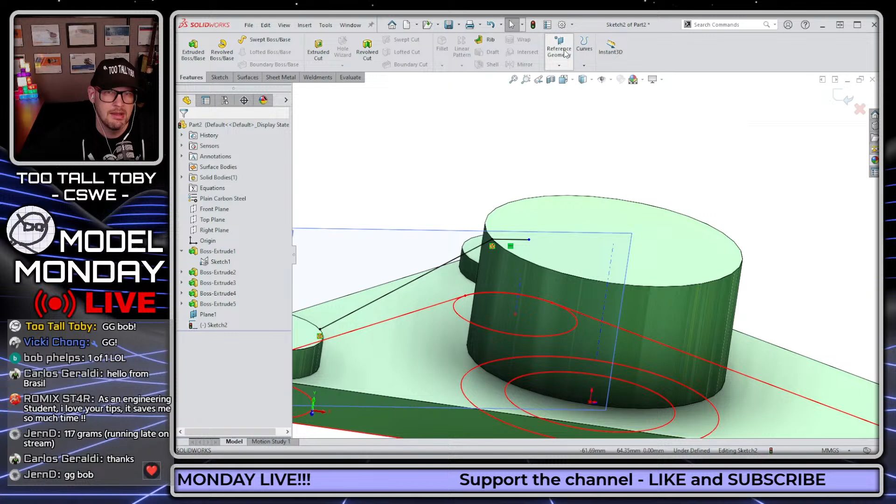And boom, look at that. The rib solves, no problem. Pretty sweet. The problem is that we end up with this kind of stepped area here. And sometimes if you show that to the customer they'll say, that's not what I want. That doesn't look right, there shouldn't be a little step there.

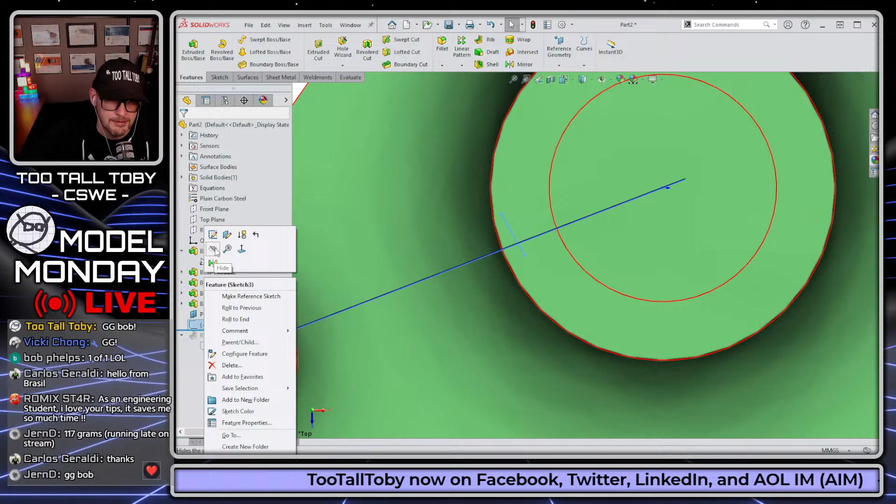So instead of piercing this here, we could figure out what the distance is back onto that cylinder face where that 7 millimeters would be perfectly intersecting. We could draw a line here at 7 millimeters, go to a top view looking down on that line, take that line, hold control, pick our plane, let go of control, and say make perpendicular. Now we've got that 7 millimeter line and it's perpendicular to our plane.

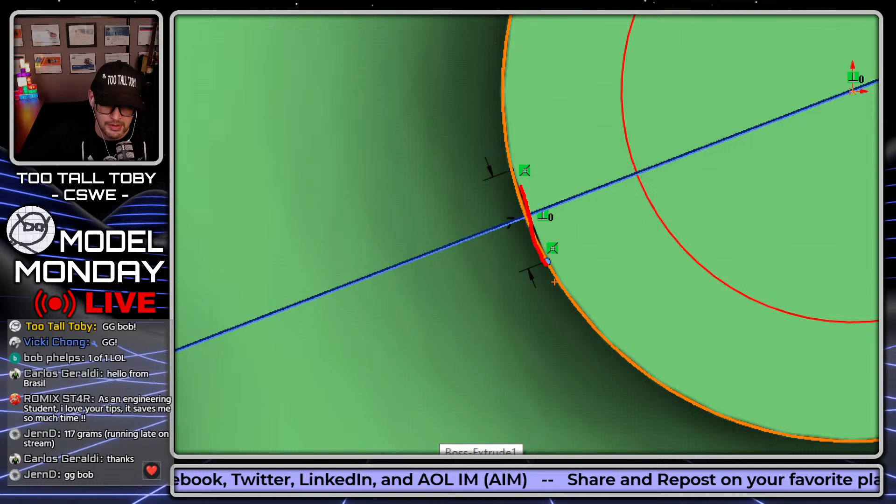We could take this end point of the line and put it on this edge, and take this other end point of the line and put it on this edge. So now our rib will be constructed going from this point over to this point on that 7 millimeter line we just created. So now when we roll forward to the rib sketch...

So when we roll forward here to the rib sketch, we could make this pierce relationship not to the arc, but instead to this line here. We want this point to connect to where that line passes through the sketch plane, which is really the midpoint of the line. You could do midpoint coincident as well - pierce isn't really the point in this scenario. The point is that now we can construct that rib and it's going to end up looking something like this.

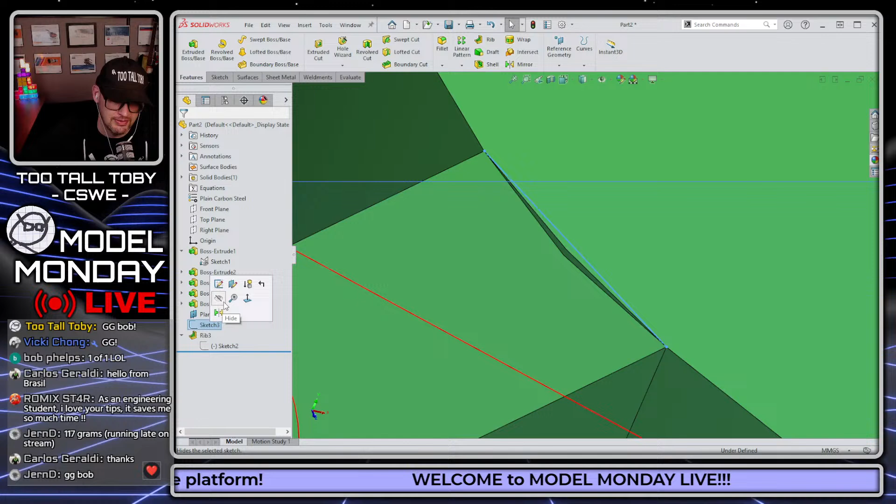Now, the problem is that we have this little sliver of material here, and the customer certainly is not going to want that either. But in most CAD packages at this point, you could use a command like insert face delete, choose that face, say delete and patch, hit the check mark, and look at that - now that area is cleaned up and you've got a nice patch area there.

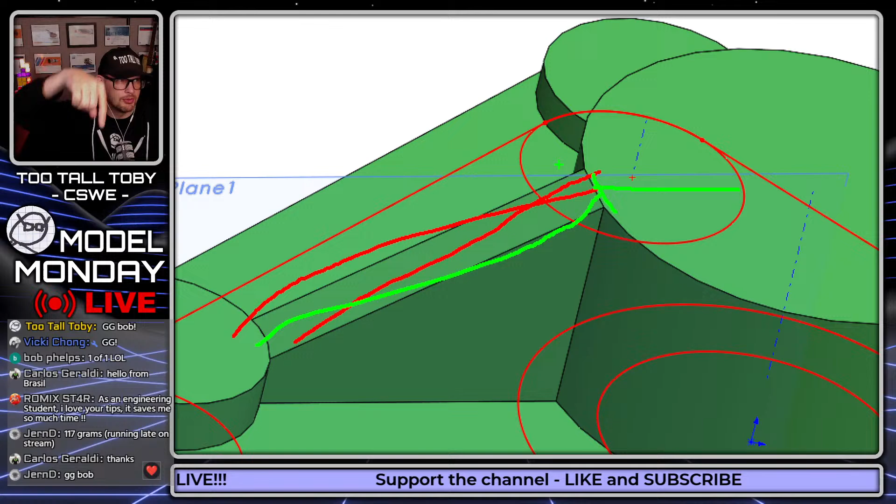So that's the rib in a nutshell. Whenever you're trying to create a rib and go up to a tangency point, like an upward slope on a cylinder, you're going to potentially run into this issue. The easiest solution is to draw a little flat spot on the rib, and then it will be able to extrude up to next in all 3 directions. But if you don't do that, the rib won't know where to terminate in this direction - it won't have anything to terminate on.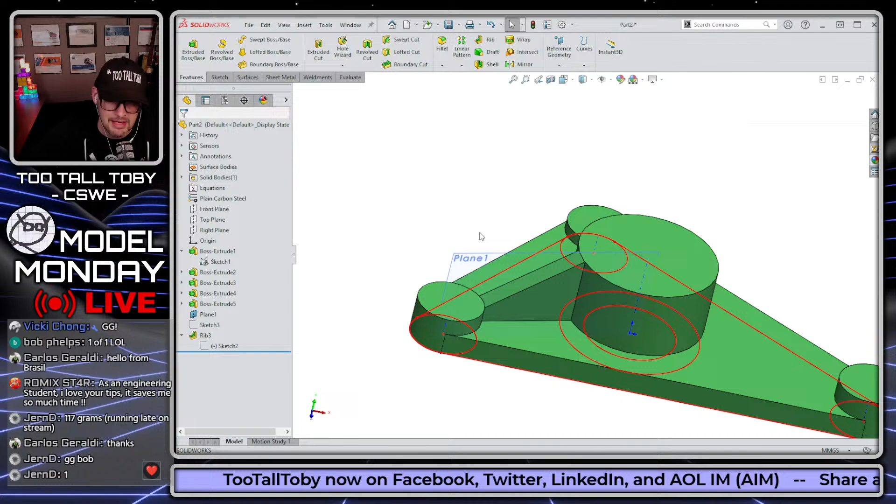So we'll take this and pierce it here, and we'll leave that extra little flat spot on there, and that's going to construct that rib. Thank you very much, Jern, for the 1 in the chat - glad that was helpful. Let me do this again here.

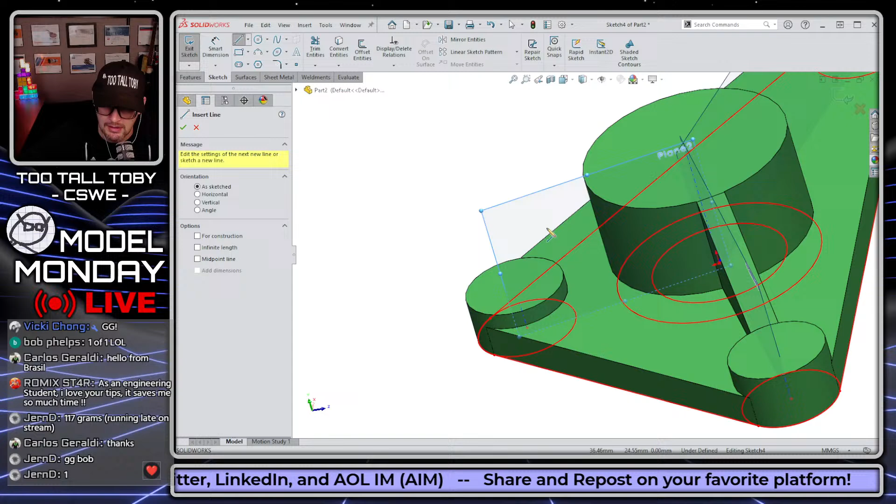Reference geometry plane - we'll make another plane here for our second rib, and I'll just press enter to repeat that command again. Reference geometry plane, and we'll select this angle or axis and this axis here. Now we have our 3 planes for our ribs. Now we're going to basically rinse and repeat: a line here that comes up, a little tiny flat spot, take this and pierce it to the cylindrical edge.

Pierce, and then we will do the features rib. This has no problem extruding up to next in all 3 directions now, so it extrudes up to next down here. You know, we show this to the customer and they're like, yeah, that's fine, don't worry about it, we can deal with that. That's what we wanted. We want it to be touching here at tangency. So that's good, and then we can repeat again to over here.

Select this plane, begin a sketch, draw a little flat spot here, pick this point, hold control, pick this curve, pierce, pick this point, hold control, pick this pierce.

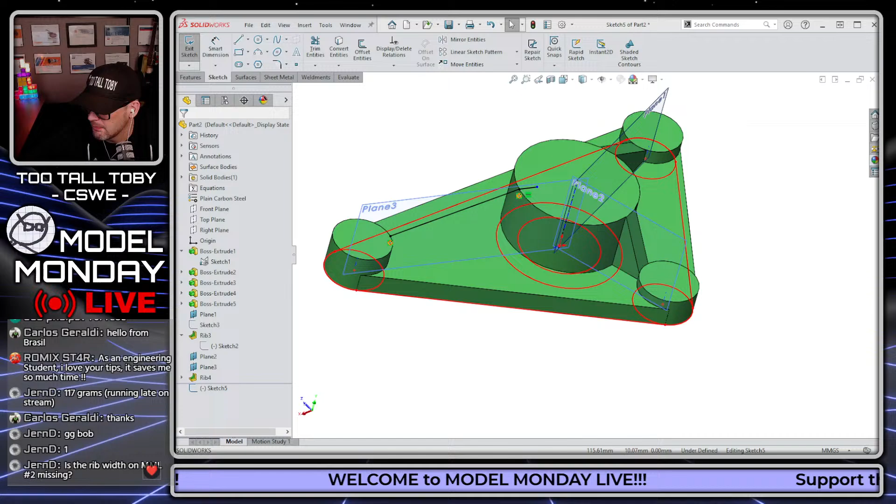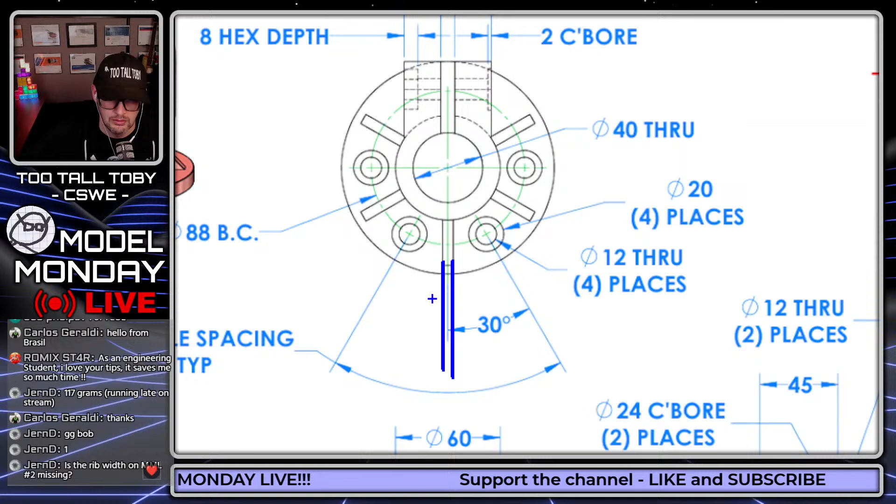The rib width in the MML number 2 is missing. Let's see, the rib width is, I think it's 8. No, it is missing, and it is 6, thank you. Sorry guys, this guy here is 6. Yeah, assume the rib is 6.

QwertyCA in the chat. We were just talking about him earlier. Wow, welcome, welcome, great to see you in here. Welcome, thanks for joining us.

Think we're missing a dimension there. I do apologize, everybody, it does happen. We're going to call that 6.

I'll confirm, Bob coming in with an answer, 2366. I like it, I like it, good job everybody. Thanks man, I love your content. Thank you, I love your content as well, so that's very nice of you to say.

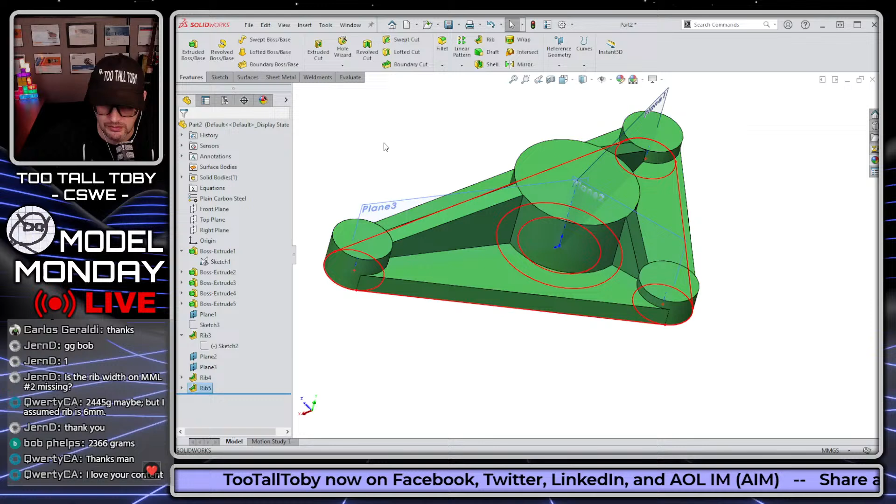All right, so finishing this thing out here, we got this rib. Let's go features rib, and we're going to make that 7. And there we go. And then here's kind of a cool trick that you can do.

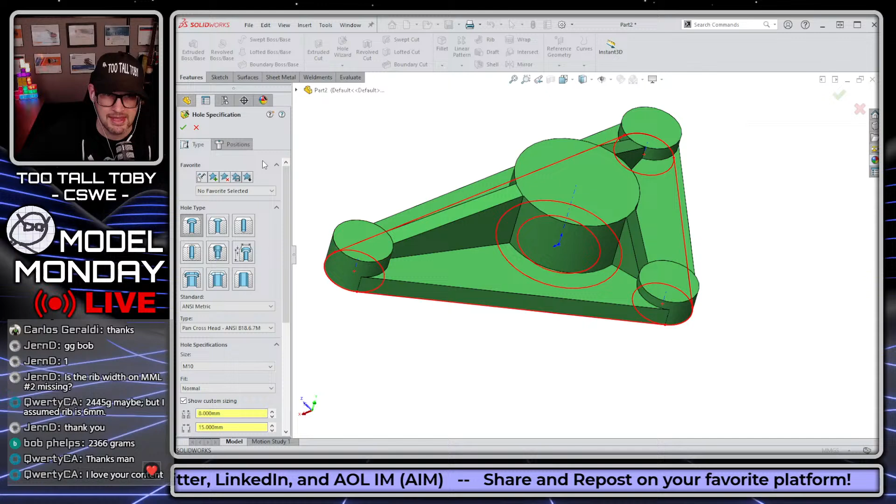This is a hole wizard hole that's being called out on this print. It's being called out in 3 places. So that hole wizard hole is 3x, 9 through, by 16 counterbore diameter by 7 deep. So what we could do here is we could go hole wizard without pre-selecting a face, and then we can come down here to the custom sizing. So this is going to be 9, 16, 7. I'm using the tab key to advance through there.

Then we can go to positions, and now we can choose 3D sketch, this button here. That will let you actually make all 3 of these in one shot because you're doing it as a 3D sketch. If you hold your cursor over the edge of that cylinder, you can wake up the center point of that cylinder for each of those 3. So kind of cool how you can get all 3 of those holes in one single hole wizard if you know the trick: begin the hole wizard, pick your size, go to positions, and then click this button here for 3D sketch. That'll let you drop a 3D sketch of those points at the 3 different heights instead of doing hole wizard, hole wizard, hole wizard 3 different times. So kind of a cool little shortcut you can use there.

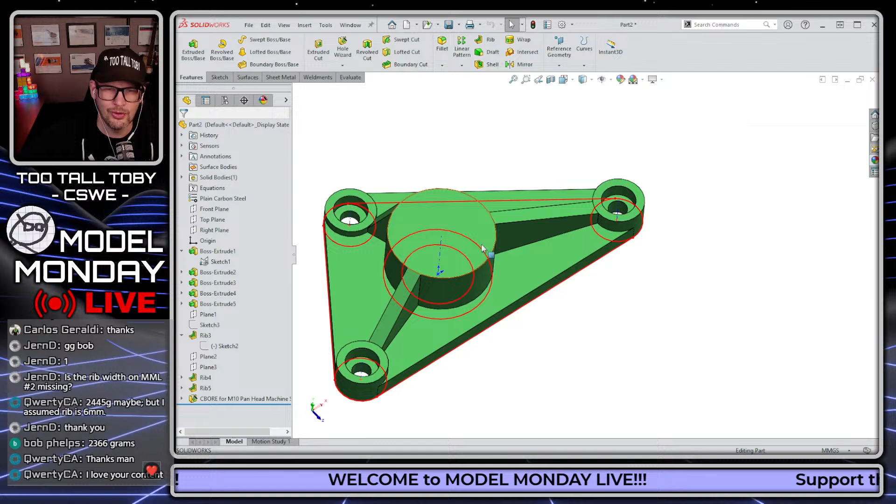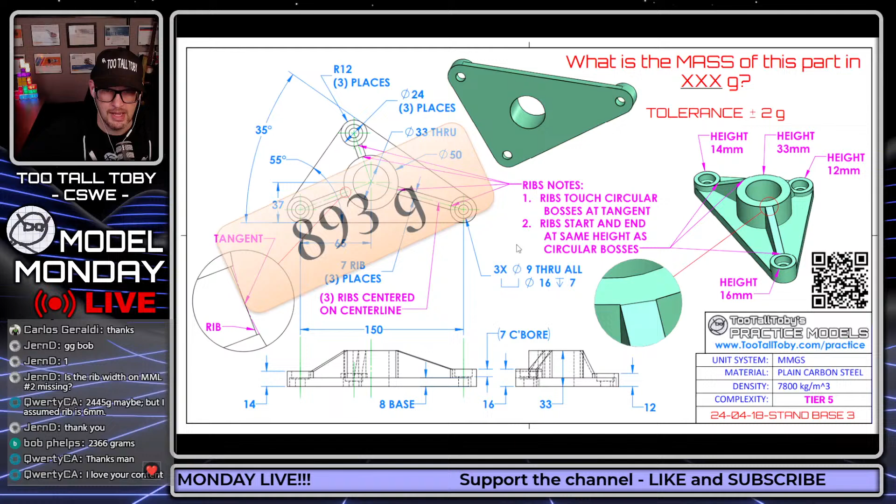So now we're going to finish this up by doing an extrude cut, from this circle here, reverse direction. It's going to go through all, or 33. And then we can do the final spin, look this thing over, take a look at our sensor and rebuild here. The answer we're coming up with is 893 grams. If we go back to the PowerPoint, let's see, did we get it right? 893 grams. Oh yeah, let's go.

So that's your SolidWorks tutorial, SolidWorks live solve for that stand base 3. It is a tier 5 part, there's some trickiness in it. I think the biggest tricky part is the rib, and that's why we made a special video just for that. But there's some other cool stuff in that challenge, and I hope you guys enjoyed that.

Petar is in the chat. What's up my man, thanks for joining us. Petar, welcome, welcome, thanks for joining us.

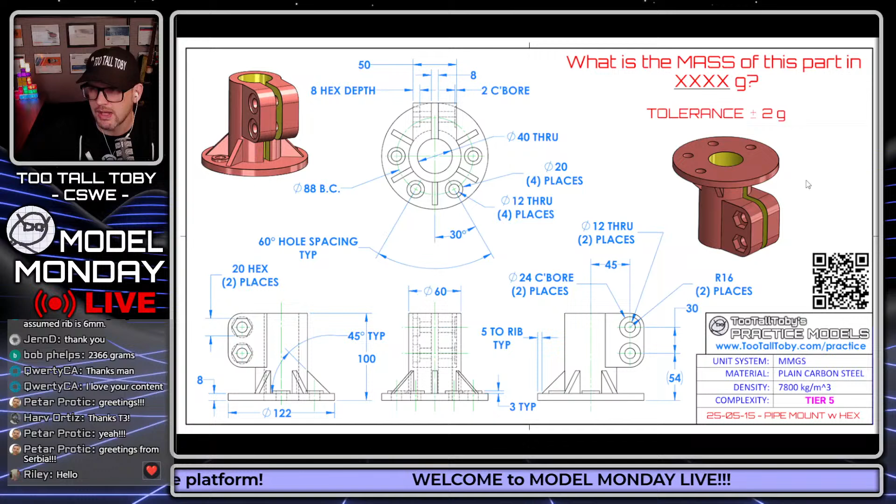2366. Let's go, Bob, clean sweep! Congratulations, that is awesome, good job, man. Bob getting in there with a clean sweep tonight, representing Iowa. That is awesome, 2 for 2. Congratulations, congratulations. Yeah, GG, Bob, well done.

And was that rib 6? Let's just confirm. Don't forget, guys, the quickest way to measure something in SolidWorks is just pick one face, hold control, pick another face, and then look down here in the status bar, and it will tell you the distance between those faces. So yes, it was indeed 6. We did it.

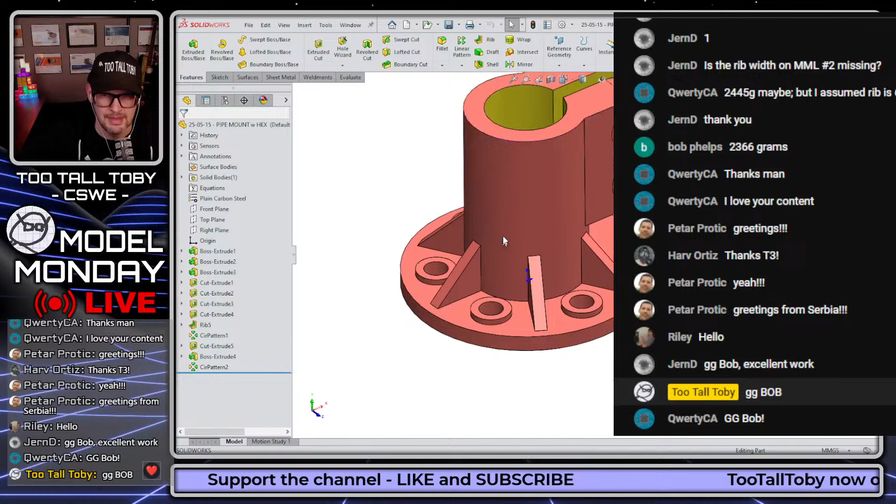Nice, Bob, great job, GG. GG to Bob, clean sweep tonight, 2 points on the board. Well done, closing out May with a huge win. Congratulations to our winner.